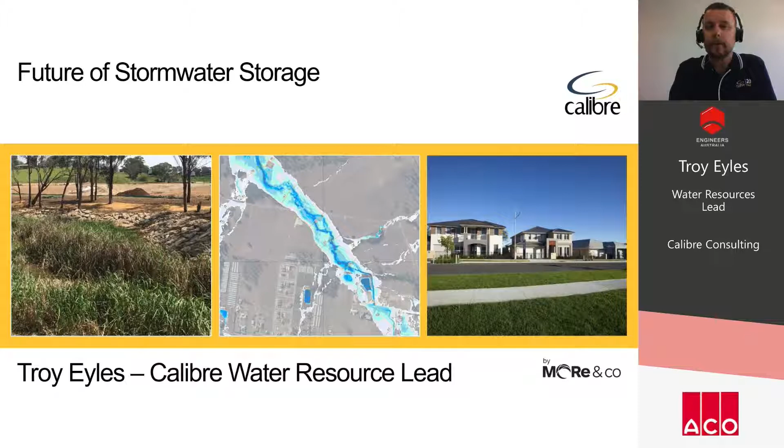So to start with, I'm going to go back to why do we need storage? We start with the fundamentals so we can all be on the same page. I will then quickly move on to the types of storage, the benefits of below ground storage, and some of the considerations when you're selecting the type of storage.

I'm sure we've all seen the water cycle going back to the days at school. And really, nature was really in sync. We'd have rainfall that infiltrated and fed our vegetation, runoff went to our creeks and rivers and entered our surface water, evaporated, and the cycle went. As I said, nature was very in sync.

And then we introduced humans. Probably more realistically, as we started to progress, we started to replace some of the vegetated pervious areas with these concrete jungles of hard surfaces. Suddenly stormwater became problematic, and our solutions traditionally were about getting water away as quickly as possible. So we introduced concrete pipes, concrete channels to really get that flow away. But really all that did is increase some of the volumes, increase some of the flows and velocities, and cause poorer water quality for our receiving waterways.

So while there is a need for concrete pipes and channels, we also had to think outside the box a little bit, be a little bit more creative on how we manage stormwater. And that's when stormwater storage became its own field. There are a number of storage types - we'll be focusing on detention, retention, and infiltration.

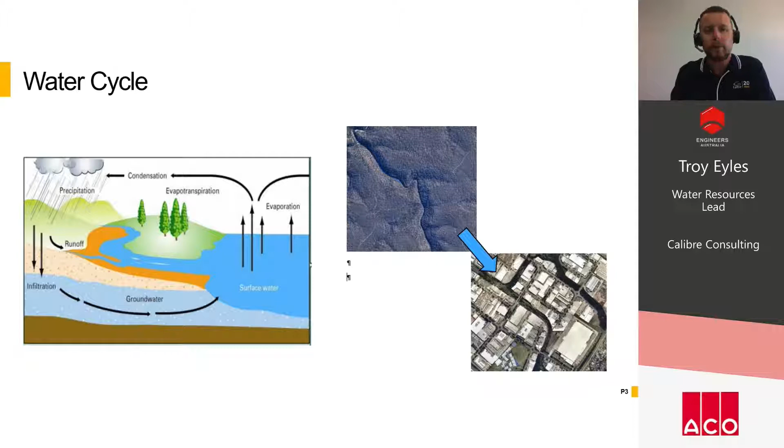Stormwater detention is really an effective means for managing some of the flooding and excess stormwater flows. It really is only a temporary storage of stormwater during the storm event that's then released at a controlled rate.

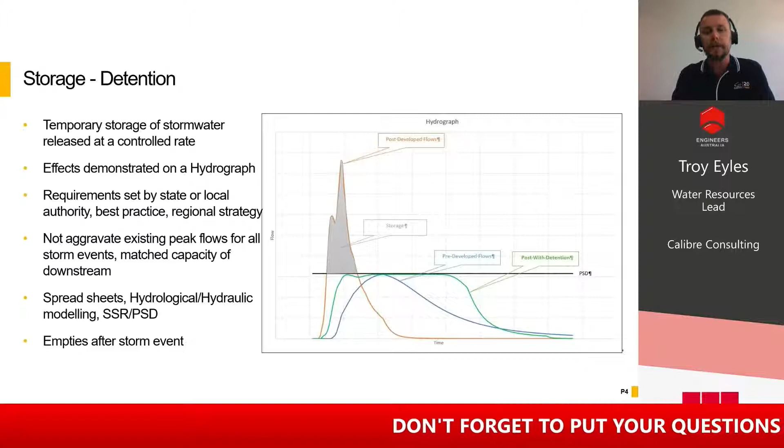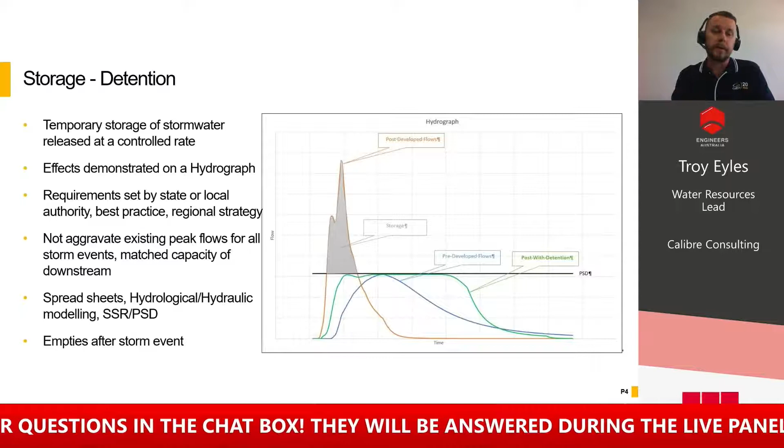We can sort of calculate this on back-of-the-envelope calculations or detailed spreadsheets, but more times than not it's usually hydrological and hydraulic modeling that's used to size this. So that's a matter of representing some of these pre-developed and existing catchments and determining the flow rates for those, then seeing what would happen when we increase these impervious areas. Then we hydraulically model these tanks and outlets, trying to mimic some of those existing peak flow rates and size these detention systems.

Alternatively, some of the local councils may have already done some of the heavy lifting with the modelling, and they'll be able to provide you with a site storage requirement or a PSD, which is the permissible site discharge. That typically will tell you the volumes and flows you're allowed, shown as a per hectare of site area.

It's important to understand that with detention storages, they really need to be free draining. They need to empty as the storm finishes, so they're ready to go again, with that active storage ready before the storm event starts.

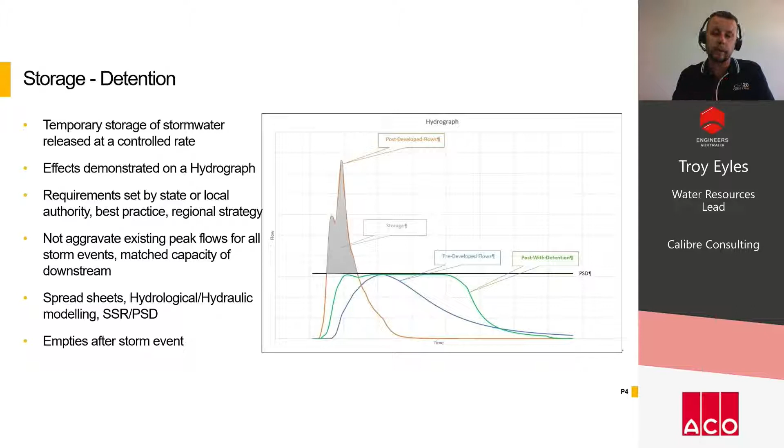An alternative storage is retention. Now, retention doesn't replace detention - it's more part of the overall water cycle management. So that's the holding of stormwater for reuse, to meet some of our reuse demands and also manage some of the volumes.

Once again, the requirements are often set by authorities, which will specify minimum volumes that need to be met, in line with some of the best practices. There could be a regional strategy developed for that catchment that will specify those. But more times than not, it's defined by the water demand.

We can often be quite forgetful in these times of heavy rainfall and flooding, that not long ago a lot of us were under quite tight restrictions. The dam levels were down, we just didn't have the water supply to meet some of our demands. And that's where water retention really comes into its own - it's about understanding those demands and supply and matching that up, and that's probably best done by a water balance.

It can be in spreadsheet form, but also your MUSIC and other modeling programs are best suited. They're about modeling some of those rainfall events and the distribution of those rainfalls, understanding the catchments, and understanding those demands and what reuse and storage is required to meet those demands.

The key to any effective water balance and sizing of a retention system is really understanding the reuse and the uses. A lot of the time we look to harvesting and irrigation as a reuse, and they are an effective reuse, but the catch-22 is when we have the most rainfall, our storages are full, which is when we don't need to use it for irrigation. So it's best practice to have alternative methods which aren't weather dependent to be compatible with the water harvesting style of things.

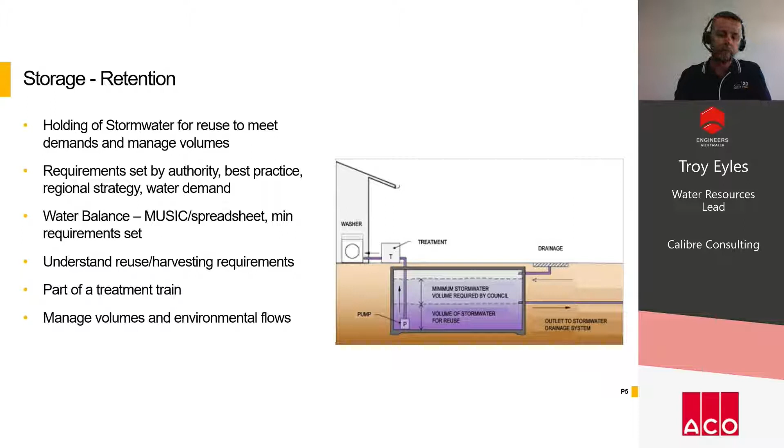The third opportunity for storage is infiltration. It really is an effective way to manage flows, volumes, and also some of the water quality. It's just the storage that holds the water while we promote the infiltration into the soil. It recharges the groundwater, but also starts to try and mimic some of the pervious areas of the natural catchment by introducing the water back into the environment and filtering through that way.

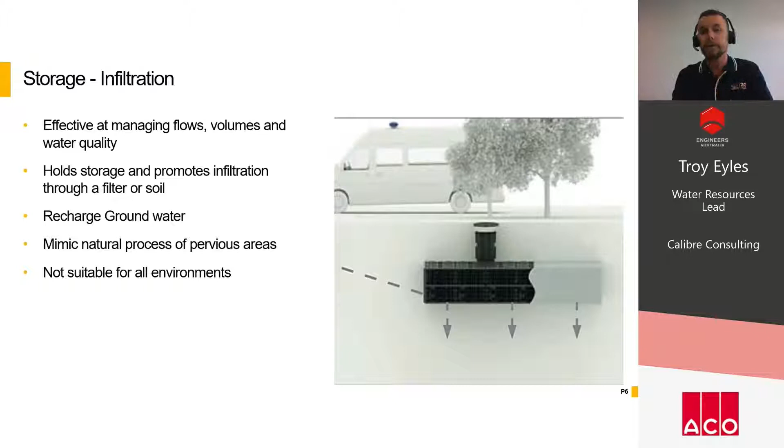It's important to understand that infiltration isn't suitable for all environments. For soil types that have a very low infiltration rate, such as clays, it really doesn't work very effectively - there's no sort of drainage through those soils. Alternatively, with saline or sodic soils, it's really not a great opportunity to promote infiltration. It's better to keep the surface waters and the groundwaters separate in those scenarios.

When we think of a lot of stormwater management, we do envisage these large regional basins at the end of the line. And while they're very much an effective place for regional treatment, it's often hard to find the land areas that aren't heavily constrained that these sort of storages do require.

So the introduction of underground at-source storage really does open a whole lot of new possibilities. It allows us to have multi-uses for the stormwater management. They can be within the building surface footprint itself. They can be in the basements. They could be underneath an open space area. It also doesn't have to be all below and all above.

So there can be a combination of the two. You can have your nuisance, regular storm events being contained within an underground storage that then can just overflow into a multi-use above-ground area for the more rare and high storm events.

Overall, our below-ground treatment can form part of this overall treatment train. It can be combined with some underground pre-treatment or alternative methods and form part of that treatment train to achieve some of the water quality targets.

The other advantage to below ground, they're a very known area. The square sides and equivalent volumes can be calculated quite easily with no changing parts. There's no degradation of batters. There's no vegetation which could sort of absorb some of this active storage area. So they're very known, sufficient, no-changing solution.

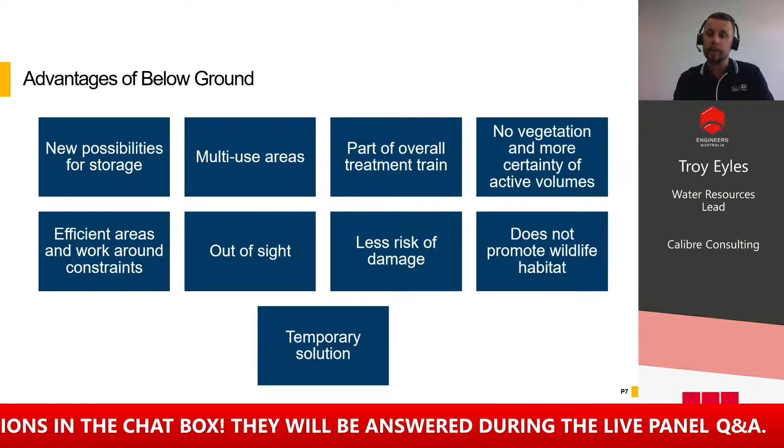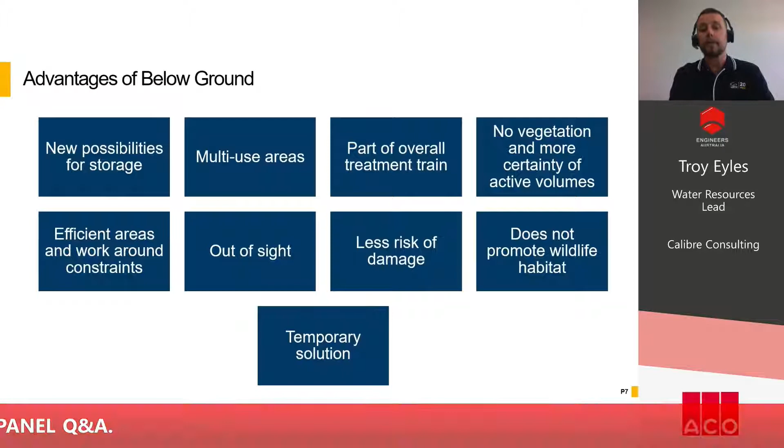With stormwater management, we often do look to try and mimic some of the natural environments, but these can create habitats for wildlife. In some areas that isn't quite ideal - in a lot of cases that might introduce pests. You'll often hear about bin chicken habitats forming in a lot of these stormwater management systems. You might have heavy foot traffic where you don't want to promote dangerous or potentially venomous animals to be within the region. Also, if you're working around an airport or a flight path, you may have regulations not to promote bird life because of the fear of interaction with planes. So there are solutions in putting these storages underground, to just avoid the need for wildlife habitat.

And lastly, with these regional basins, they are quite timely, and often the development is ahead of them, so there's the need to provide temporary solutions. The underground storage means that we can progress with the development while not having to wait, and also achieve the water quality targets in a temporary nature.

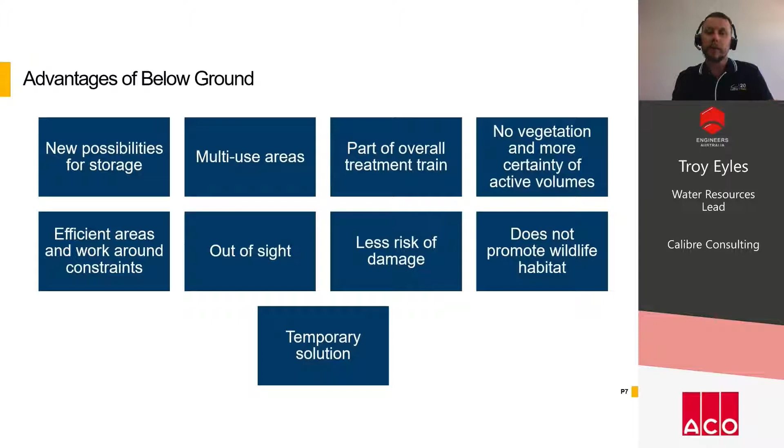There are a lot of considerations when it comes to designing and picking what sort of storage to go with, and it starts well before the design. You're going to start to think about some of these levels, specifically with the detention basins. They really need to be free draining, so these outlets, although underground, need to eventually see daylight or connect to a system.

We need to really think of the hydraulic constraints. Is there backwater that could be affecting the performance of these issues, and design around those? And while we talk about potentially having underground storage combined with basements or under building footprints, we really need to consider design for failure, so having these emergency overflows in the event that the outlet gets blocked or the system fails. We can't have damage to buildings or potentially risk of life, so we need to incorporate those well early in the design.

We also need to consider what is above or surrounding. What's the soil mechanics? What's the groundwater like? What sort of structures are above? And that really leads into the design of the structure itself, when you consider the materials, not just in terms of strengths, but in terms of the environment. Are they environmentally friendly? Does this material suit this environment? And then move on to consider whether there's some precast or modular opportunities that we can use.

The multi-use is really the advantage in the underground systems. It's how can we combine these detention, retention, and water quality structures in the one unit, and potentially what other uses can we have? So really maximizing our area.

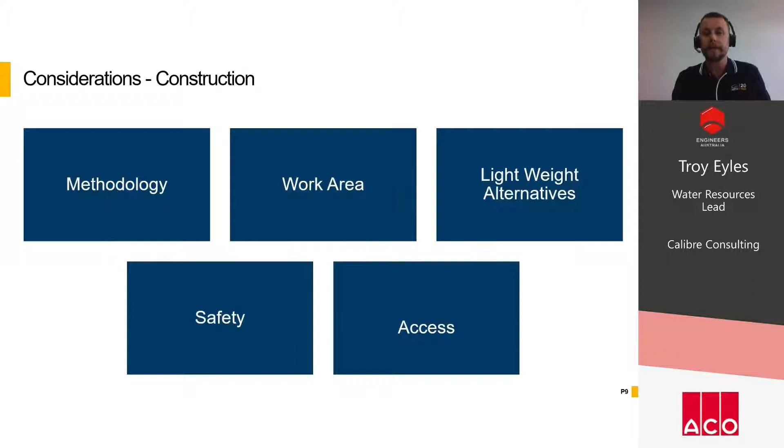In the design, we also need to consider construction early on. We need to understand the methodology and how we can work around that. What area do they have to work with, and how can we make it easier for the ultimate construction? Are there lightweight alternatives which can really limit the sort of machinery required and make it a lot safer for those workers? And consider access to this site. A lot of these sites are very constrained, and understand how we can design to make this easier to access and construct.

And then ultimately, we need to start to really think about the operational phase and start to consider what will be the lifespan of this design when we're selecting a unit. And then consider, when is this storage going to be online? A lot of the construction processes, and specifically the construction sediment, can often be detrimental to a lot of these stormwater systems. So think hard and fast on when this unit will be online and what sort of measures we can use to protect the unit during the construction all the way through to its operation.

And that leads us on to maintenance. You really want to minimize the need for maintenance, and that might require some pre-treatment of gross pollutants and coarse sediments prior to the unit. But ultimately, it's not avoidable. You really need to design for access, but think about how we can minimize the need to access into the unit. What machinery is required, and how can they get in there, early on into the design?

And ultimately, safety. We think from the construction perspective, but ultimately end user. How can we avoid people having to enter this and avoid public access? How can we think about potentially the inlets and outlets and how public safety could be affected by that?

And finally, consideration is more heavily on the certification. We think about how this is going to operate and how this has been constructed, and how ultimately someone has to put their name to it. So you really need to be confident with both the operation and construction of these units. A lot of the precast and available products online have had rigorous testing, so by all means, critique that and use it to your advantage to understand the units that we're going to be putting in.

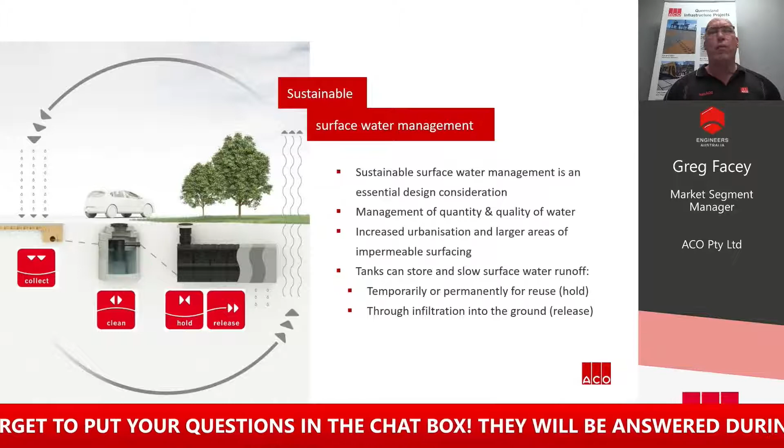Underground tanks are used in a lot of projects as councils legislate to protect their downstream waterways and infrastructure. Managing both the quantity and the quality of water being discharged off a site is only going to grow in importance, particularly as our cities urbanise and rainfall events intensify as the climate changes. These days, large areas of the built environment are covered by impermeable surfaces, which increases the risk of flooding. Tank solutions are a conventional way to store and slow down surface water runoff to pre-development rates, as well as replenish the groundwater at a more natural rate.

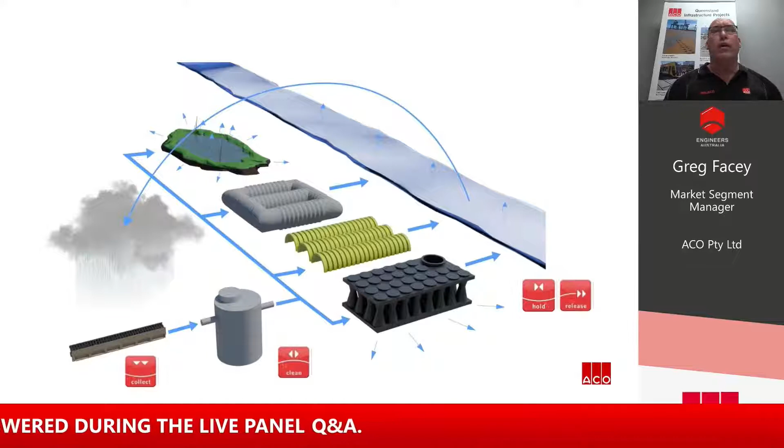These are the system elements that are designed to work with the natural water cycle. On a slab or a pavement, drains are typically positioned to intercept or collect stormwater runoff, which is then treated or cleaned to prevent clogging or contamination downstream. As you can see on the image, there are a number of tank solutions available to engineers and urban designers, both natural and engineered structures.

Some of the engineered tank solutions include cast in place, precast concrete tanks, arches, and plastic structures. But today we'll focus on just plastic stormwater tanks, which can be easily integrated in a stormwater management plan for the infiltration, retention, or detention of the surface water runoff.

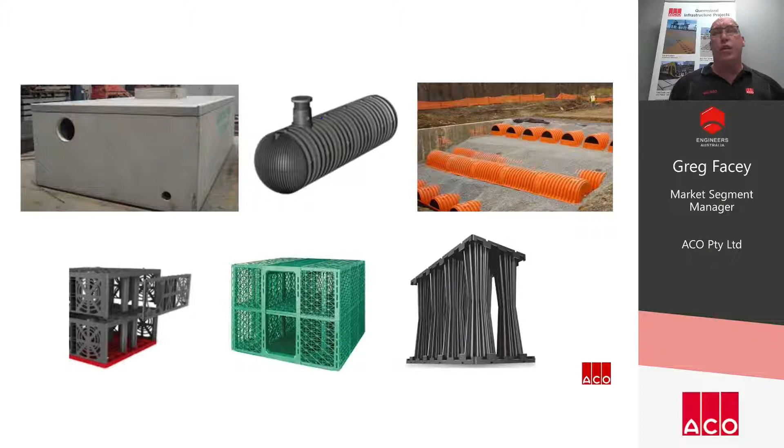Detention systems, also known as attenuation systems, are designed to spread the peak flow of a storm event. It does this by holding and releasing stormwater slowly, controlling the runoff to reduce the risk of flooding downstream from a development. A retention system collects and stores water permanently for reuse, for example to water landscaped areas. Infiltration systems, or soak wells, are used a lot in sandy areas to temporarily store the water to allow it to naturally seep back into the ground to replenish the dropping water table.

To illustrate this, retention and infiltration are two common adaptations of these tanks to make the best use of captured stormwater. Retention, so it can be used for irrigation or reuse purposes, and infiltration, where the soil can naturally free the water from its impurities. In both cases, the water is used at or close to the source of collection without it flowing through any downstream infrastructure or receiving waterways.

But if discharging into downstream infrastructure is the objective, then as I explained before, detention gives designers the greatest control over the quantity of water entering it. In simple terms, it's an easy calculation.

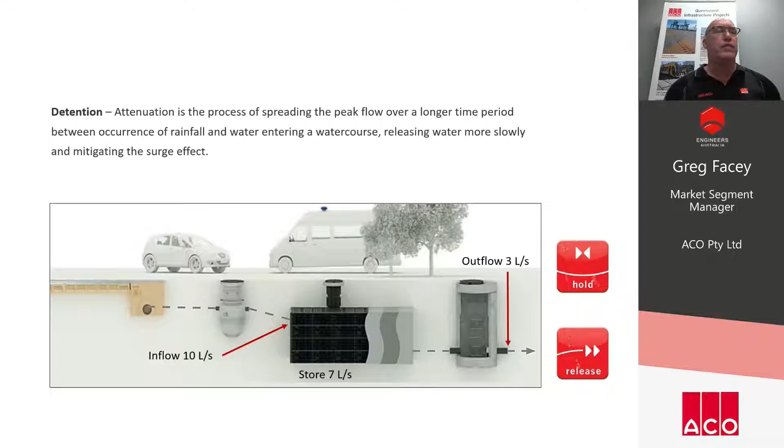Before I go on, I want to make a special mention of two types of hydraulic control structures. First are stormwater treatment devices, located upstream of the tank, with their performance individually assessed and governed by the EPA and local DA requirements. Depending on the project requirements, there are many types, from gross pollutant or silt traps, stormwater filters, to even light oil separators where hydrocarbons exist.

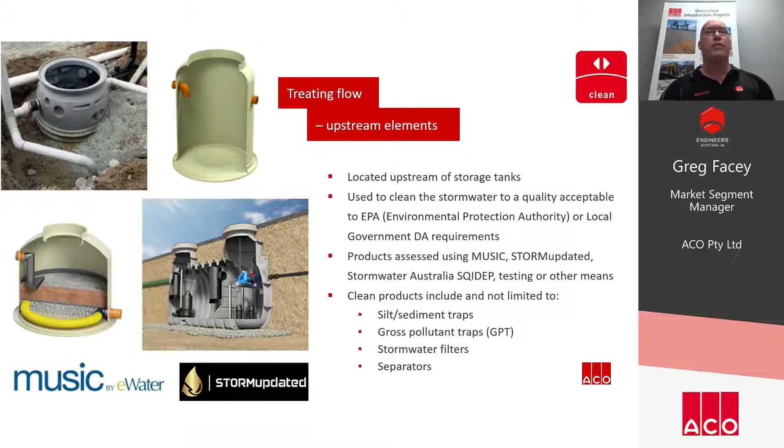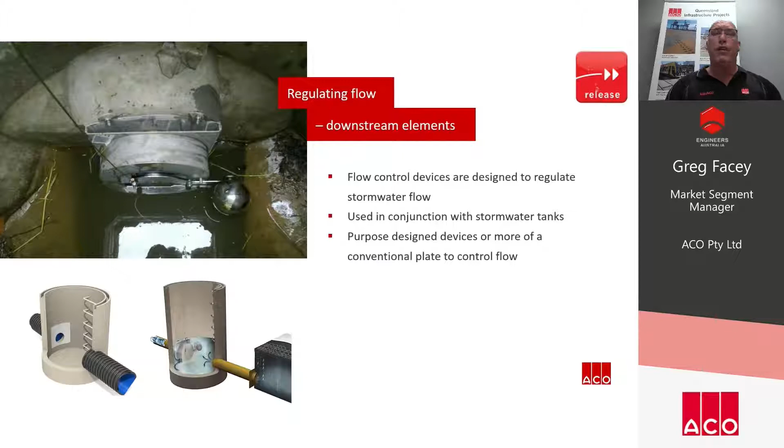The other type of hydraulic structure are flow control devices, which, as the name suggests, control the release of water at prescribed rates downstream of the tank. These are typically installed in chambers with either purpose-designed mechanisms or just a conventional orifice plate. Now, both of these hydraulic control structures are not the topic of today's presentation, but I wanted to at least mention them as they are essential elements that affect the quality and the quantity of the water being discharged off the site.

Now, I want to go back to this slide to give an overview of the storage options available. So from the top, we've got a detention basin, and you often see these in low to medium density areas. They tend to take up space that could otherwise be used for urban or commercial development.

Next are concrete tanks. They are normally expensive to construct and transport just by the nature of the weight and the size. Next along are plastic arch systems, which require a decent amount of space. And finally, plastic tanks. Within this large category is a huge range of options, with not all being equal though.

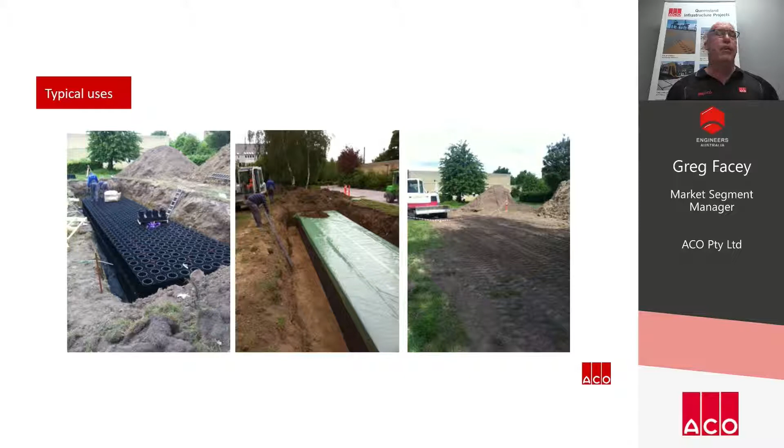So today, I'm going to focus on plastic tanks that can be assembled into producing underground cells for water storage. These can be adapted in a softscape where infiltration can be achieved. And here you can see them being assembled, wrapped, and then backfilled.

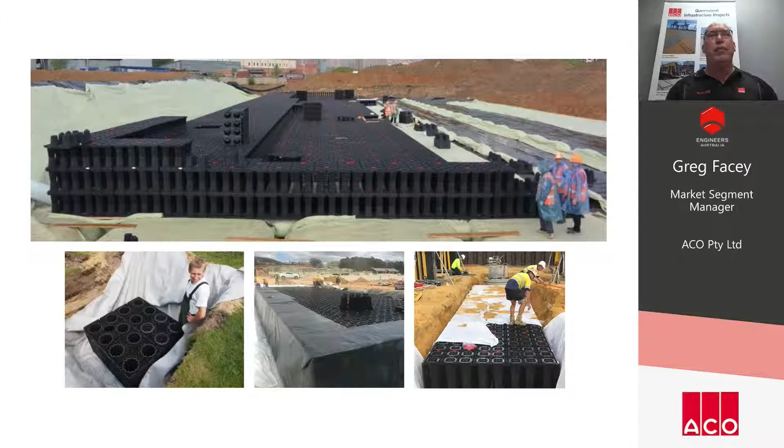But they can also be installed under slabs in commercial and industrial applications where the space is at a premium. In fact, geocellular tanks are installed in lots of projects, from car parks, driveways, in landscaped areas to commercial buildings, industrial areas, airports, and military bases.

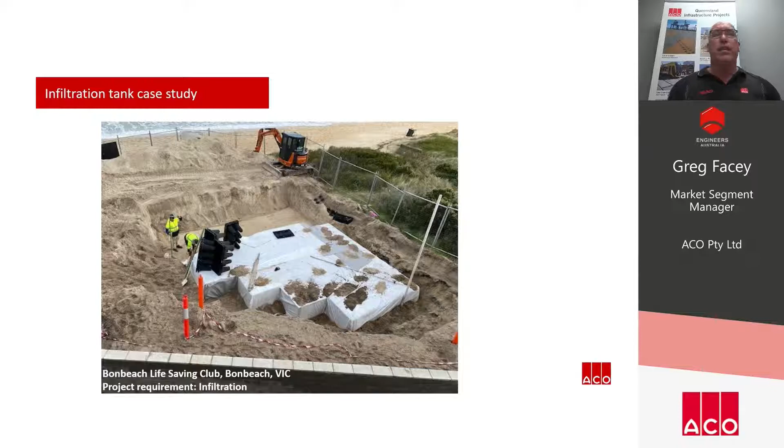So in a recent installation, here is an example of a tank being used for infiltration for a surf lifesaving club. Stormwater capture from the club's roof and its infiltration into nearby vegetation was part of the sustainability design brief. With limited space to work with, designers needed to maximise the storage capacity of an infiltration tank while fitting it into a very restricted space. An easy to maintain full bay sedimentation trap was also required.

Unlike concrete tanks, plastic tanks are quite versatile. They can be cut and joined, and the structure can be readily used for infiltration. Good designs have high void ratio and can connect to large inlets and outlets that can be easily inspected. Good designs are also load rated to hold their strength over time.

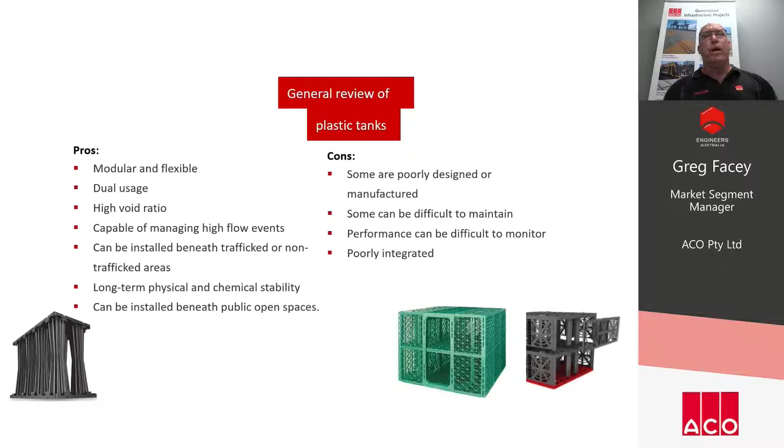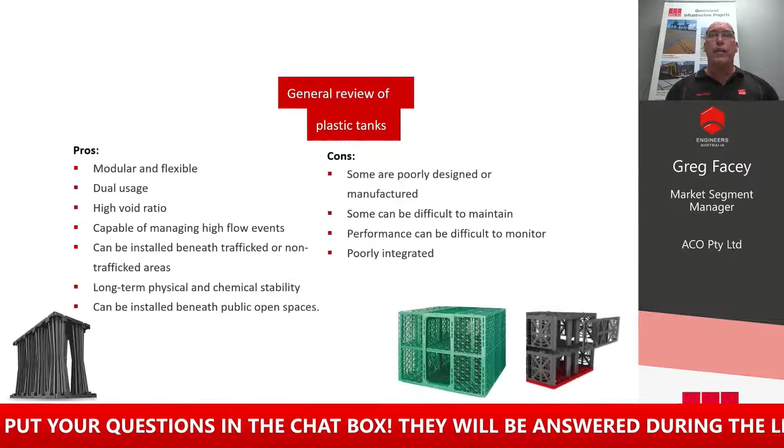But there are plastic tanks that are poorly designed, poorly manufactured, and difficult to access, monitor, and maintain. Unfortunately, these give all plastic tanks a bad name. And finally, the engineer has a responsibility too here. Despite the design or the maker of the tank, products always run the risk of being poorly integrated in a stormwater management plan.

So when specifying plastic tanks, there are a number of things to consider. Councils, through their development control plan, will enforce compliance to regulation. They will specify the methods an engineer needs to use to ensure the property meets the stormwater management plan. And this takes into account the volume of water the property needs to manage from the landscaped or the hard stand or the roofed areas.

But not only does a certifying engineer need to integrate the tanks properly, but as all key stormwater products, the structures themselves need to meet minimum strength, durability, and quality requirements.

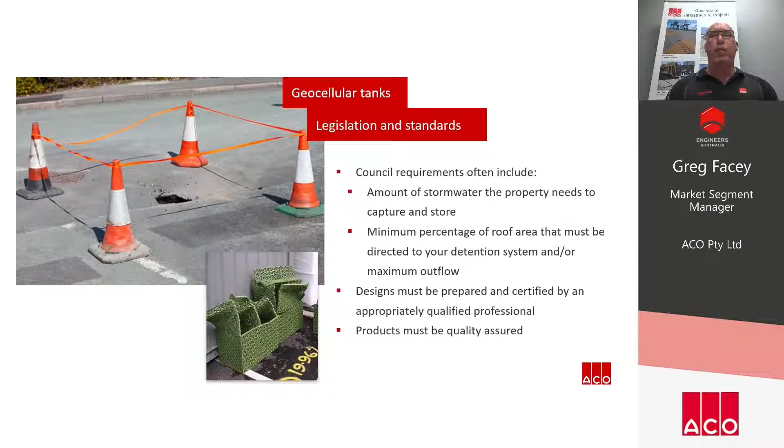But in Australia, there's no standards that actually govern plastic tank systems. And the problem with that is that some manufacturers make claims about strength and design life that really just aren't substantiated. However, there is a UK standard called CIRIA, which is specifically written around geocellular tanks. It gives guidance on testing, structural design, construction, and installation. This is really the gold standard to benchmark performance, as such, manufacturers should qualify their products to this standard to ensure that failures don't occur and the design life is maintained. So we encourage you to expect compliance to this standard when dealing with a manufacturer.

A structural design should consider the load-bearing capacity of a tank. So the stronger the tank, the shallower it can be buried, resulting in reduced construction costs. But what determines the depth of cover required are things like the soil type, tank design capacities, the groundwater level, pavement thickness, and the design loads.

CIRIA identifies these as the main factors that are overlooked that contribute to failures. And manufacturers must be able to come clean with their strength data and prove it with independent testing. So to address all this, CIRIA have detailed all the requirements for laboratory strength testing.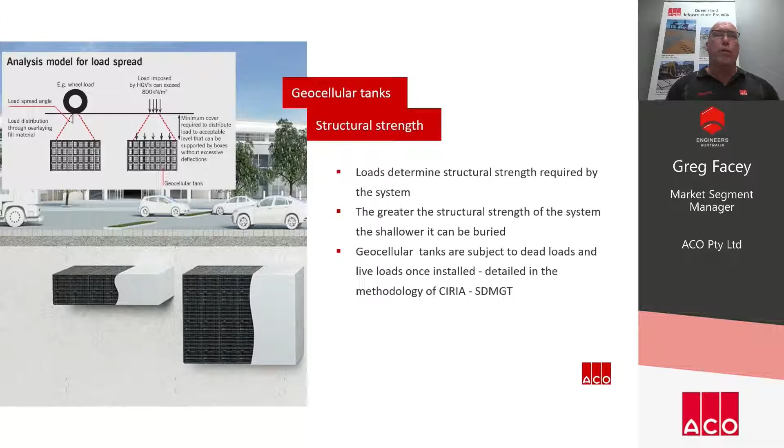When considering loads, both short-term and long-term loads must be addressed. Dead loads include the mass of soil surrounding the structure, plus the weight of any slabs or anything else permanent that a tank may be subject to. Live loads are temporary loads, things like vehicles, which also need to be considered.

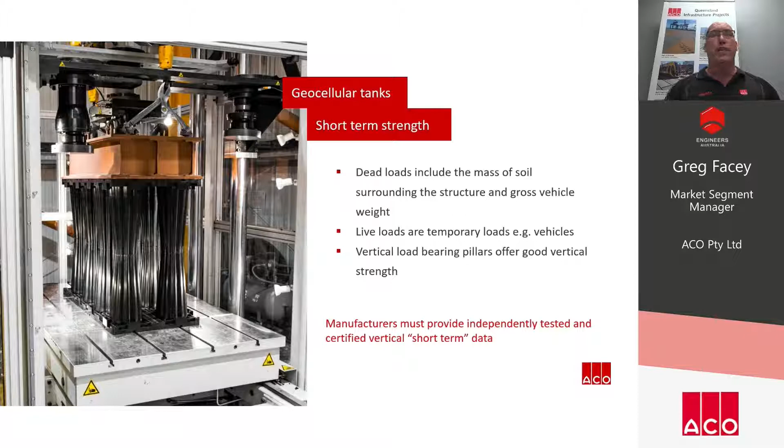Tanks that have vertically aligned load-bearing pillars will offer good vertical strength and stability, and manufacturers should be able to provide you with independently tested vertical load results.

However, lateral loading is just as important as vertical loading, as it takes into consideration the soil mechanics, and this is a key driver on how deep a tank can be installed. Be aware that specifically in high water table applications, tanks can be pushed out of the ground. So in these instances, either locate the tank close to the surface to avoid the water table, or beneath a heavy pavement to help anchor it down.

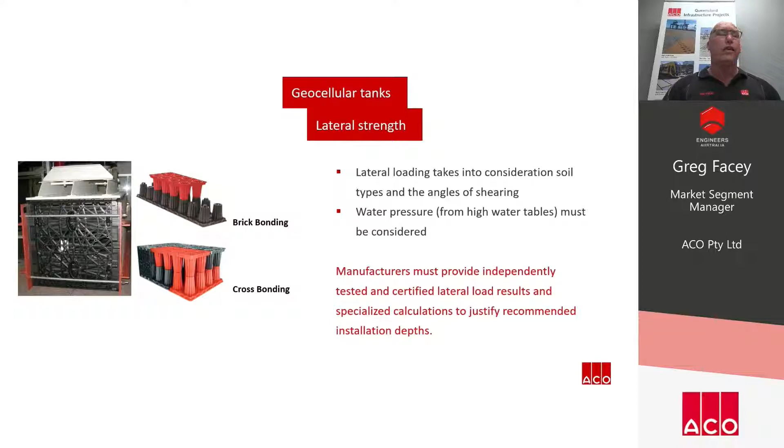Great emphasis should be placed on jointing methods, and systems that use a combination of cross bonding and brick bonding allow for a more rigid tank construction. Again, manufacturers should provide independently tested and certified lateral load data, and this is to justify the installation depths that they recommend for your project.

However, some manufacturers have a tendency to only disclose short-term and not long-term test results for their tanks. Products need to be able to sustainably support loads over the design life of the project, and this is crucial for a durable installation. Tank materials are liable to creep, meaning they deform over time, and products must be strong enough to withstand this.

Long-term strength test data allows manufacturers to determine the design life of their tanks. Not appreciating long-term strength can have extreme consequences.

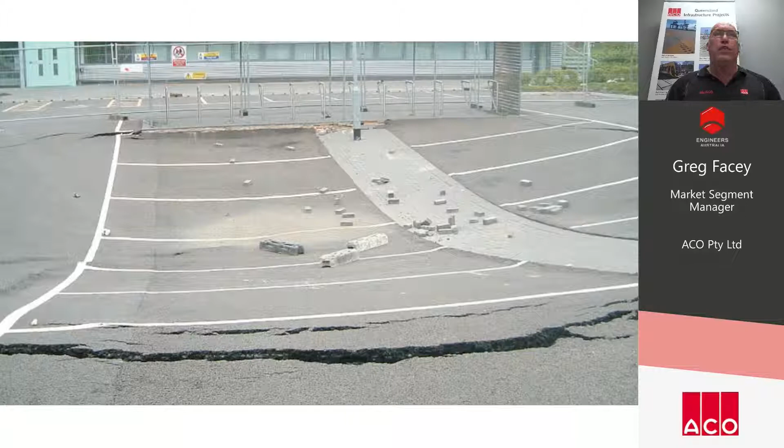Look, this is an example of an installation where the tank has failed because of creep. It's everyone's nightmare, and it just highlights the importance of long-term strength. Here's another one, not a sinkhole, but an actual tank failure in Pittsburgh, Pennsylvania.

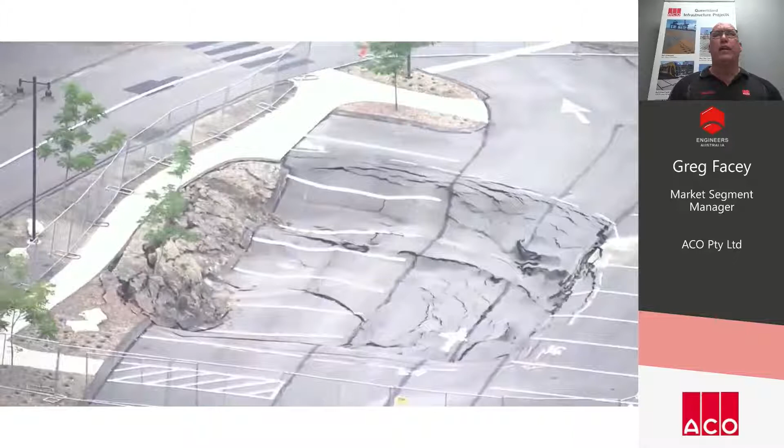Taking a tank out of a controlled environment like a laboratory and measuring behaviour in a typical environment gives all stakeholders a better indication of performance. While CIRIA provides a methodology behind laboratory static tests, ACO conducted a full-scale live load test on one of our buried tanks to an American standard. This was documented by Ohio University. Equipped with sensors to measure vertical deflection and lateral movement, the tank was installed as it would be in practice.

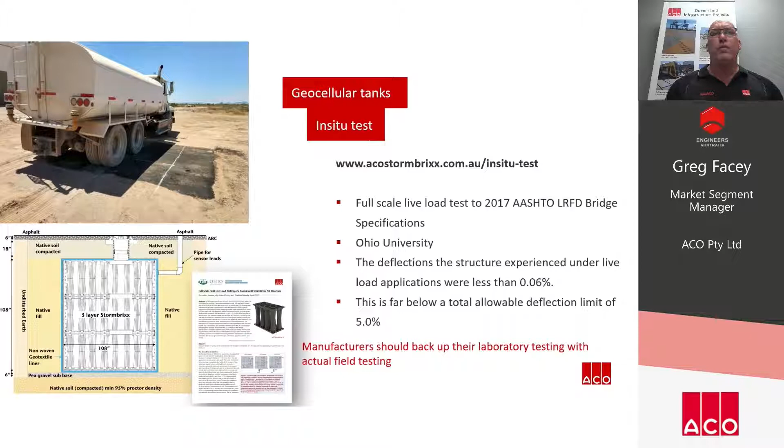Here's a short video of the test.

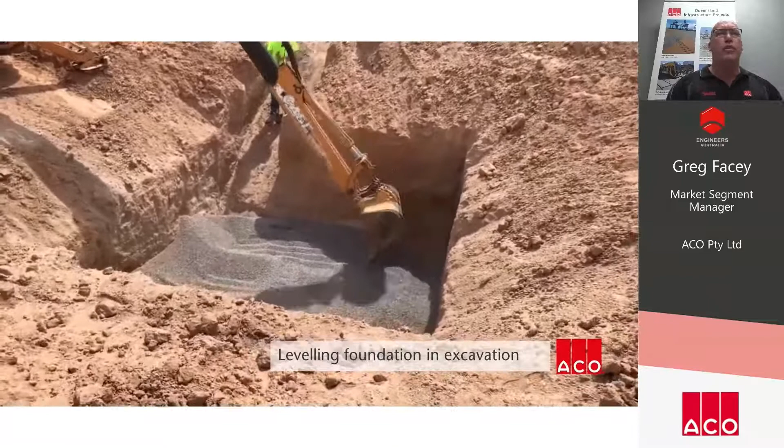It was a 15 cubic metre, 3-layer tank, which was backfilled with soil and finished with a layer of asphalt. The objective was to measure the structural responses under static and dynamic live loads, and a 27-tonne truck was used for the test. The first step was to excavate and level the foundation.

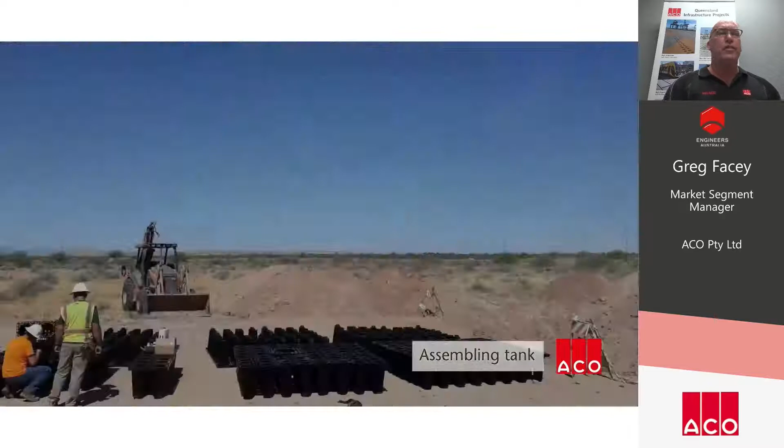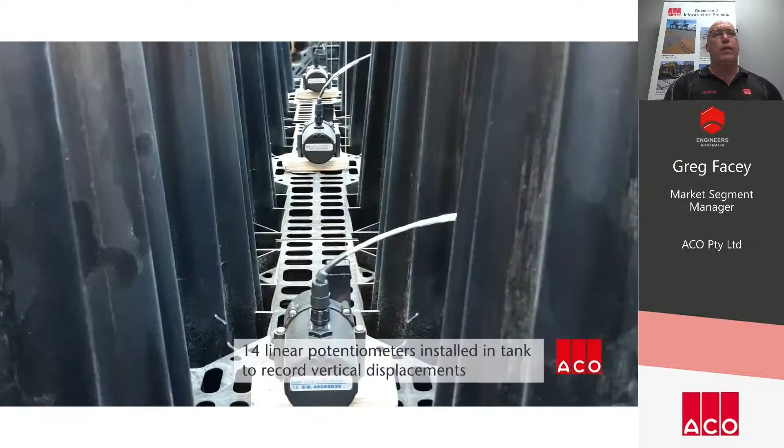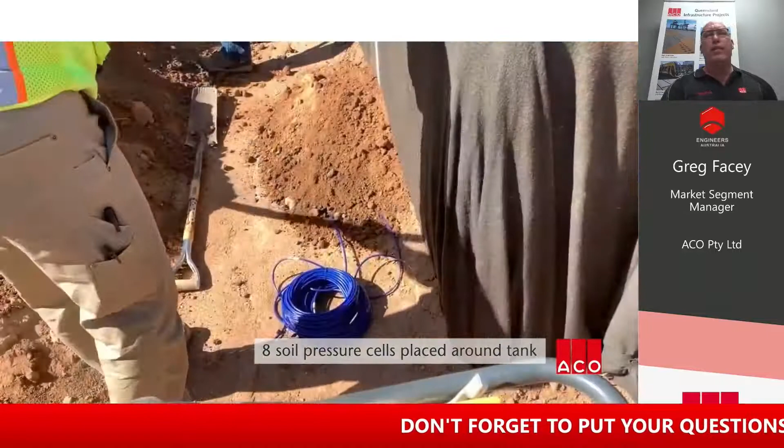Tanks were then assembled adjacent to the excavation. A total of 14 potentiometers were installed inside the assembled structure to record the vertical displacements or compression. Then, as would be the case with a typical OSD tank, the structure was wrapped with a geomembrane. A total of 8 vibrating wire soil pressure cells were placed beneath, around and on top of the buried structure to record pressures that develop in soils adjacent to the structure.

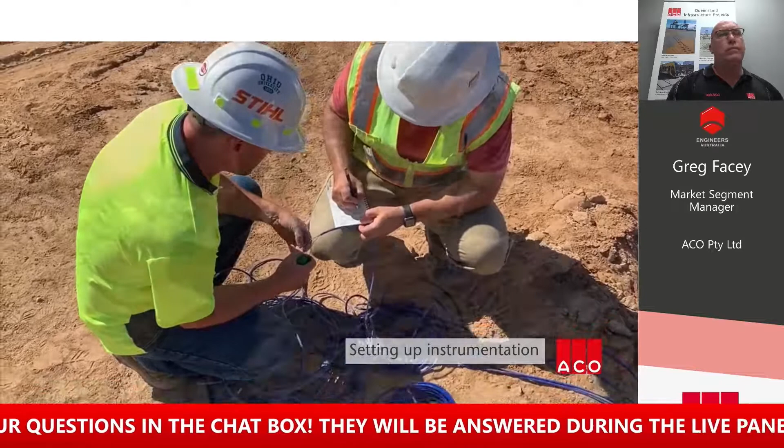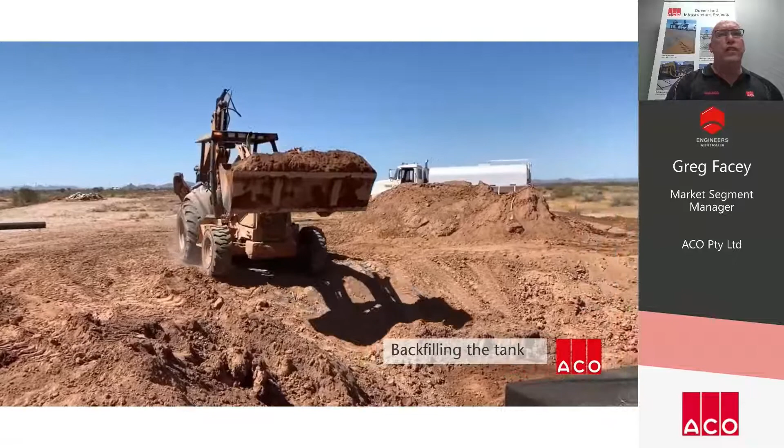To finish off, the tanks were then backfilled, then also compacted, and then asphalt rolled on top of the tank system.

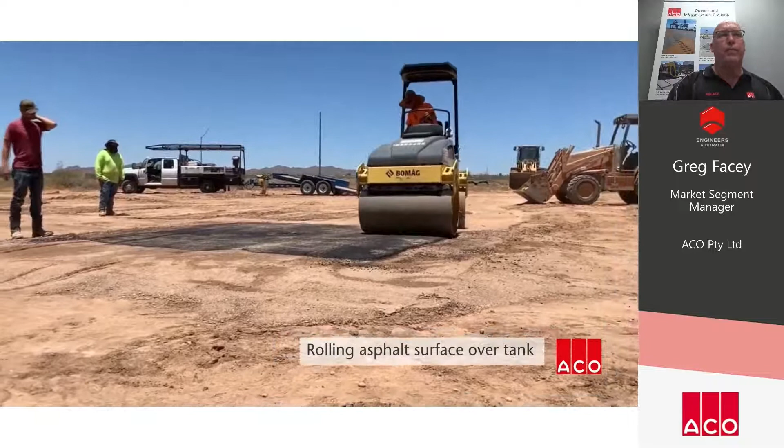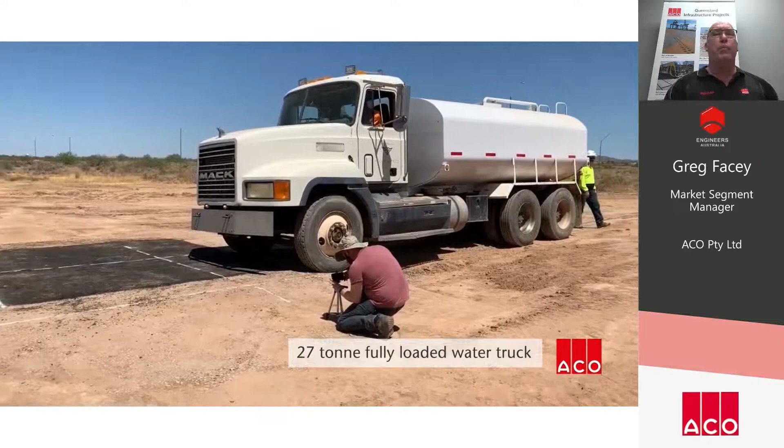During the test, a truck was driven numerous times to simulate the dynamic loads that would be experienced in practice. A total of 23 load tests were conducted, and the truck was also parked for a period of time above it to ensure the static load requirement was met. The results were all collated and the university compiled a report.

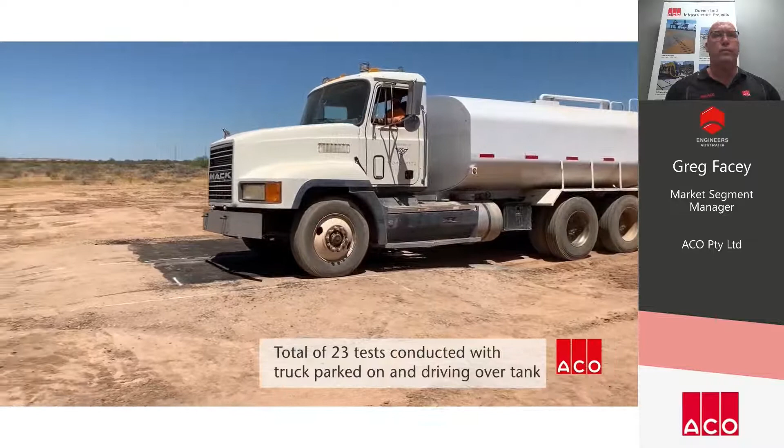The deflections the structure experienced under live load applications were less than 0.06, far below the allowable deflection limit of 5% set for buried polypropylene drainage structures in the AASHTO bridge specifications. During the repeated heavy static load applications, the structure recovered most of the load-induced deformations through elastic rebound upon unloading. Overall, the StormBrixx SD structure proved to be rigid with elastic properties, stable and strong.

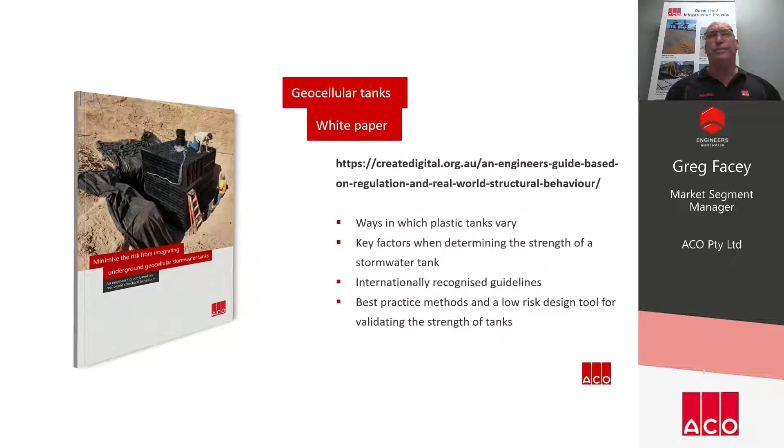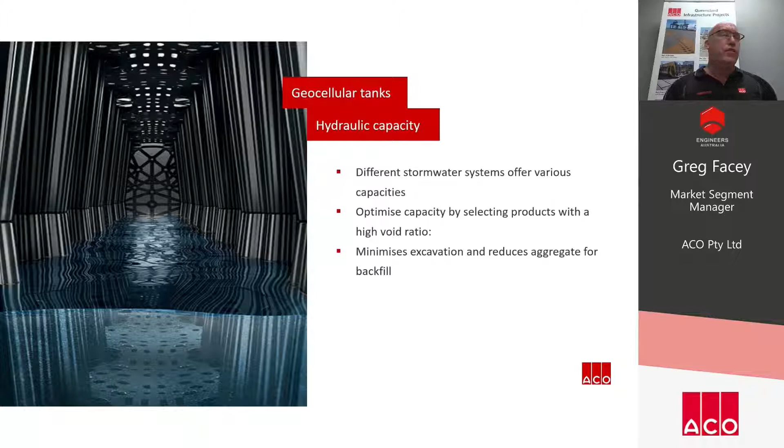For tanks, the hydraulic capacity refers directly to the volume of water that a structure can store, and different tanks in the industry will of course offer different capacities. You can optimize the capacity of the tank by selecting products with high void ratios, which is over 90% for geocellular systems. Having such a high void ratio reduces excavation and obviously the construction costs because of that.

Now, arch systems, just for a quick comparison with geocellular systems, have a void ratio of around 50%, which essentially means the excavation needs to be almost twice the size. Arches hold water in the open space beneath them, as well as in the voids above them between the stones. And this isn't an efficient way to hold water, not to mention the additional costs of the stone fill.

So on the screen, you'll see an example of two tank systems side by side offering the same amount of storage. And as you can see, the installation volume of the geocellular tank is considerably smaller.

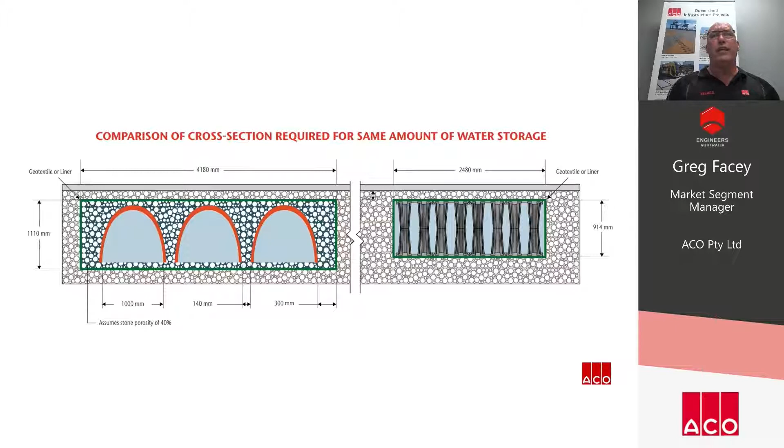As another comparison, let's look at concrete structures. Although concrete tanks provide 100% water storage inside the tank, they do have thick walls, which reduces the void ratio to around 80%, and they are expensive to build and also to install. In comparison, geocellular tanks are more economical while still providing high amount of storage.

For concrete pipes, they're obviously round, but they need a square trench, and each pipe needs about 250 mil approximately of sand or stone bedding in and around the excavation required. Means more fill material, making the installation bigger and more expensive. But a good manufacturer should be able to help you to optimize the space while helping you meet the storage volume requirements of the project.

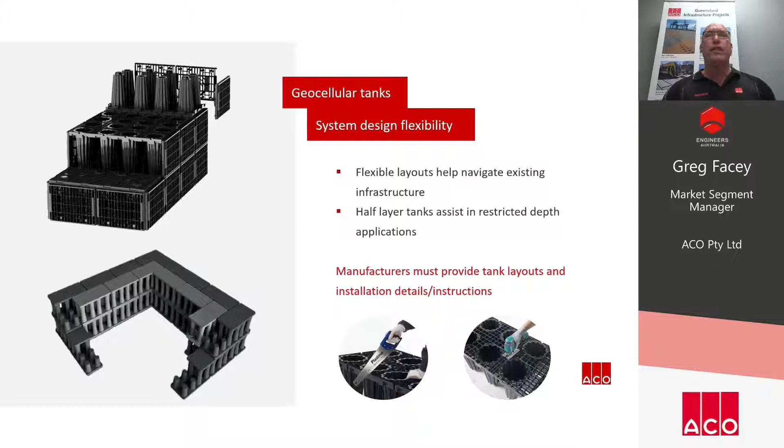A tank that's versatile enough to shape itself in and around your project will give you more options to meet the site's storage requirements. Modular tanks offer the ability to adapt themselves to the underground space with some level of flexibility. This is particularly useful when avoiding things like existing services, buildings and structures or footings. And manufacturers should give you tank layouts which help you navigate the physical constraints of your project, as well as clear installation instructions.

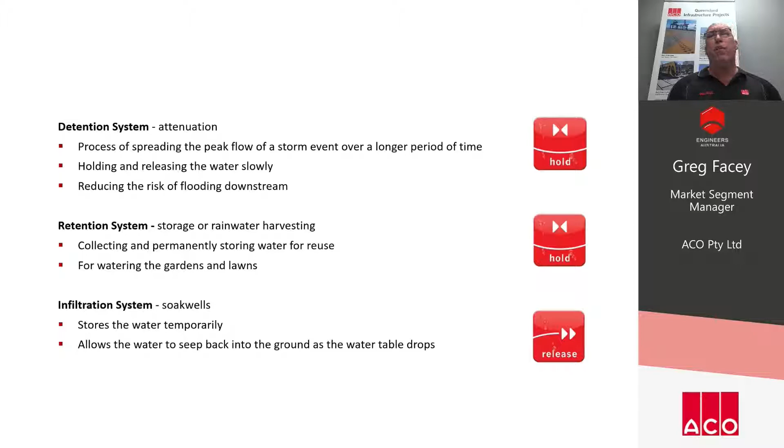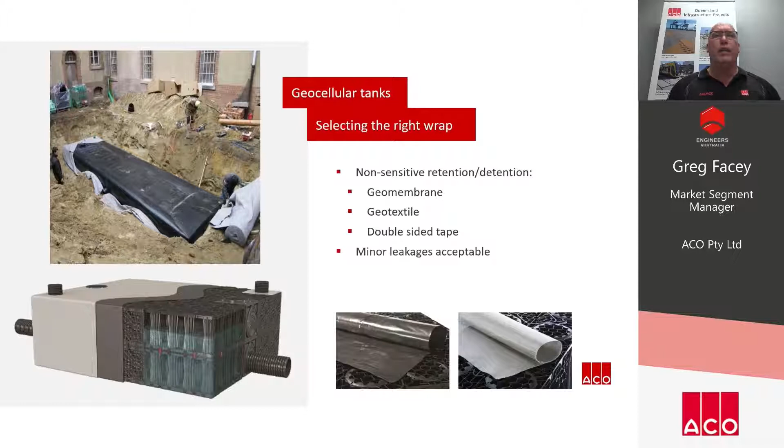As I mentioned earlier, tanks can perform any or a combination of these roles, and depending on how a tank is used, it requires a different type of wrapping. In non-sensitive retention or detention applications, geomembranes are used as a bladder for storing water along with the geotextile on the outside to protect it. As long as minor leakage from the tank can be tolerated, the membrane is normally just taped together, and this is used on the vast majority of applications.

But for sensitive applications, like a tank positioned close to a building or simply to contain contaminated runoff, we would recommend using a welded geomembrane installed by an accredited contractor. This ensures the water tightness, but as before, the geotextile wrapping on the outside needs only tape to secure it, with the focus on the integrity of the membrane. And for infiltration systems, there's no membrane used, just a geotextile which acts to minimize the sediment buildup within the tank while allowing the water to percolate.

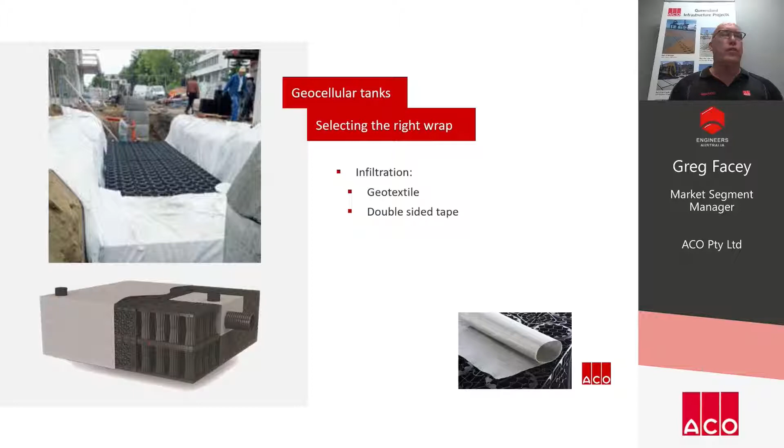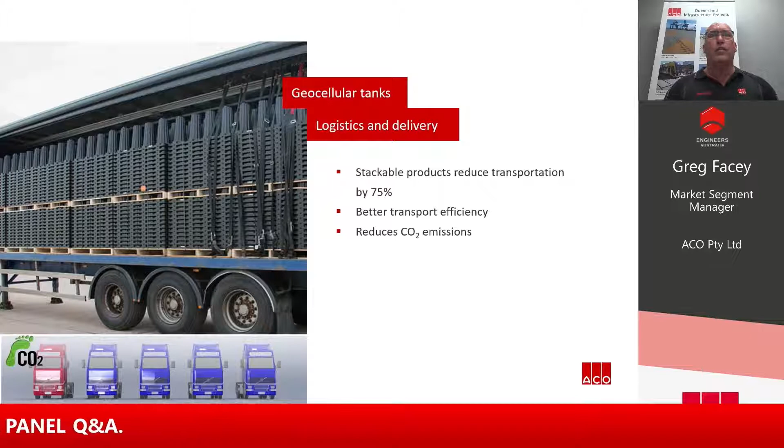Now, stormwater tanks can be very large, and moving them to site and then into the excavation can be costly. So geocellular plastic tanks are lightweight to transport. The modules are designed to stack inside one another, which means that they take up significantly less space than other products. And this leads to fewer trucks on site and fewer trips to the excavation area. Not only is this more cost effective, but better for the environment.

And the site itself should be considered when selecting a product. The time it takes to store and assemble these tanks can significantly affect construction costs. Some tanks need storage, and worse still, some tanks simply don't stack.

Some plastic crate systems are generally assembled away from the excavation area and then lowered in, and there are additional rent and labour costs associated with building and storing the tanks before installation. Geocellular stackable tanks, however, are really beneficial for sites, particularly with restricted space or labour, in that they can be built inside the excavation area and quickly.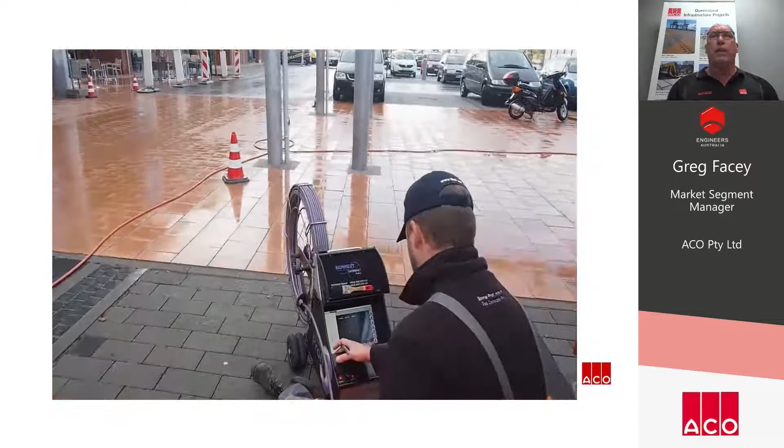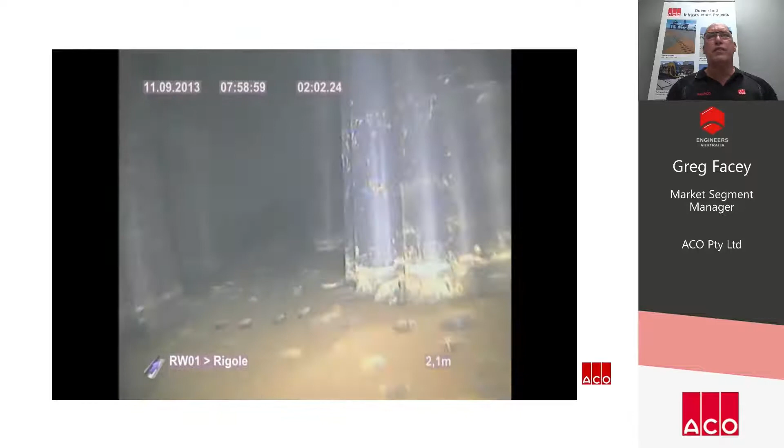Here's a short video showing how a camera was used to inspect a geocellular tank under a pedestrian precinct. You can see the camera move through the system easily without being restricted by any physical barriers in the tank. At the bottom right, you'll notice a chainage counter showing the distance travelled by the camera from the manhole.

So we've come to the end of our presentation, but to summarise, these are key things to consider when specifying tanks: compliance to legislation, the tank's design and strength, void ratios, and how easy it is to transport, plus ease of access, inspection and maintenance.

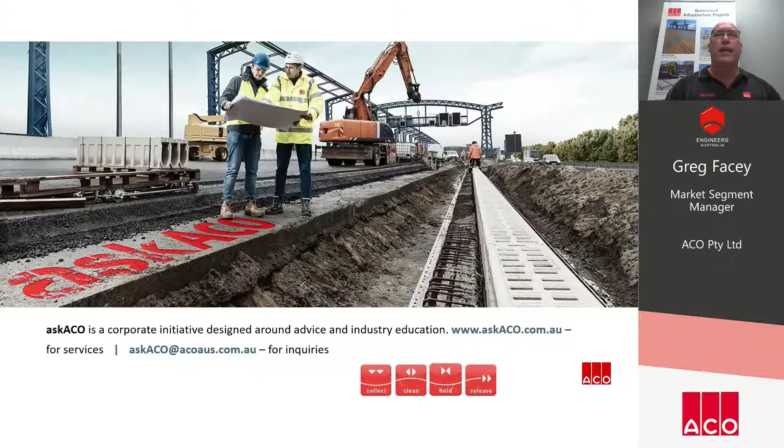As part of our suite of services, we can help you with storage above or below ground. Where the consequences of ponding of water on the surface are low, we can provide ponding analysis when temporary ponding can be tolerated, by deliberately undersizing trench drains to restrict the flow. Alternatively, we can help you remove the water entirely off the surface with adequately sized surface and subsurface drains.

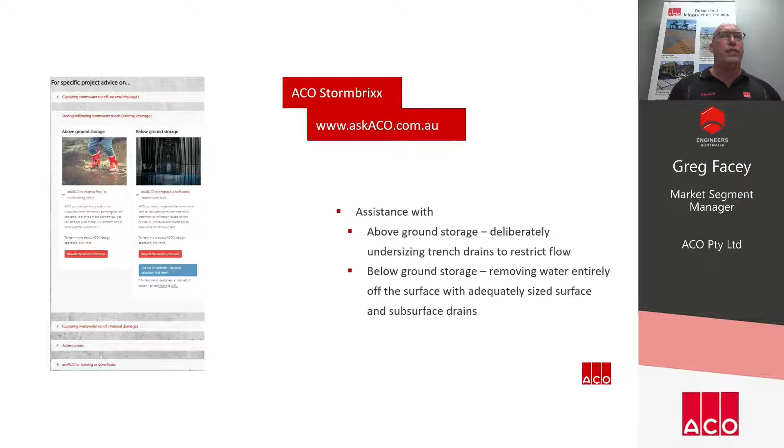For your specific projects, this involves configuring both trench drains and tanks and providing you with a parts schedule for that configuration. We can also provide CIRIA-based structural tank calculations. To make the structural validation process easier, we've designed a simple online calculator built around CIRIA.

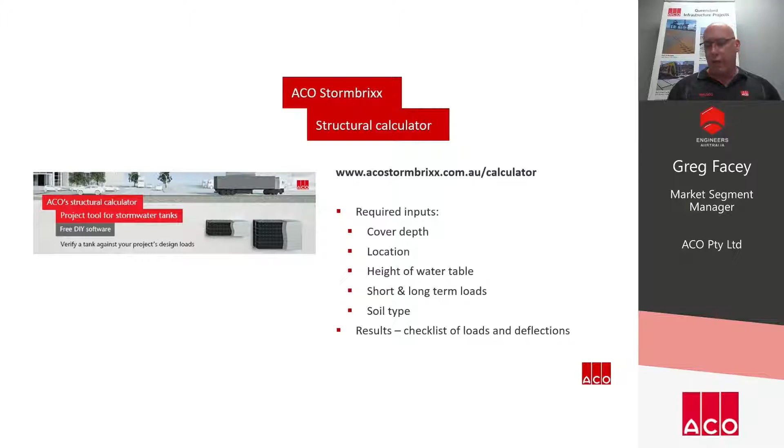All you need to do is provide some basic information relating to your project, then you'll receive validation on whether the tank is strong enough. If the results show the tank is overloaded, the parameter requiring change will be highlighted - for instance, you may need to bury the tank a little deeper. Here's a short video of the software.

After you have registered or logged into the program, click on Start a New Project at the top of the screen. Fill out the project details. This project will be saved under your login name and can be viewed or revised at a later date if required.

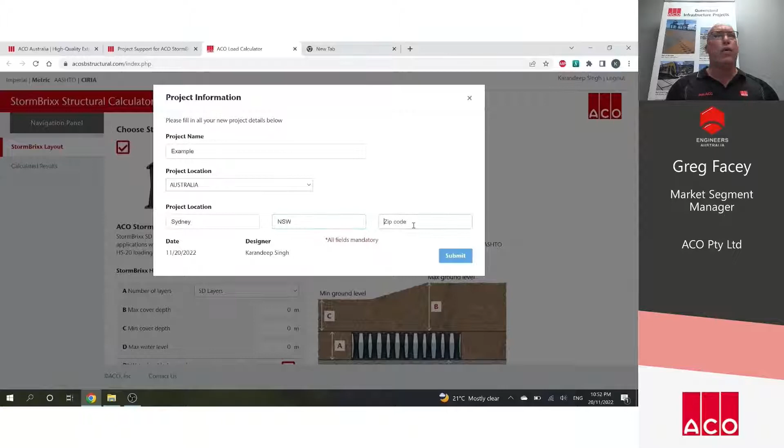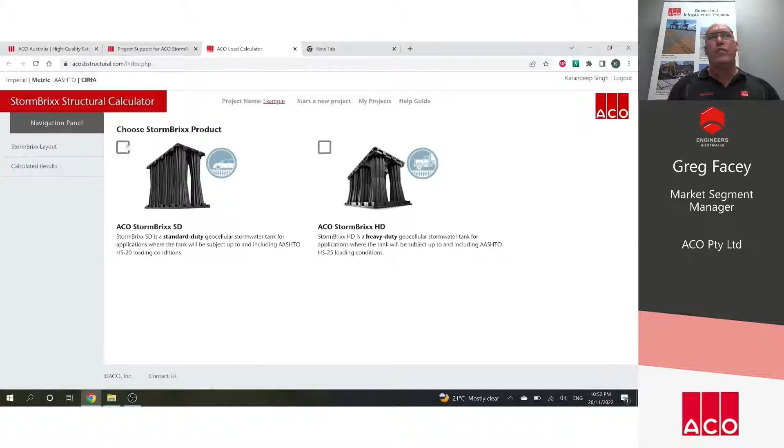Once submitted, at the top left-hand corner, you'll toggle metric units to CIRIA Guide for Australian standards or Imperial AASHTO for the North American market. To start, simply select either StormBrixx SD or HD, the number of layers, and enter the project's cover depths and water level details. For the environmental conditions section, select the live load pavement type and the soil type from the drop-down boxes that best describe your tank and project, and this will pre-fill the fields below.

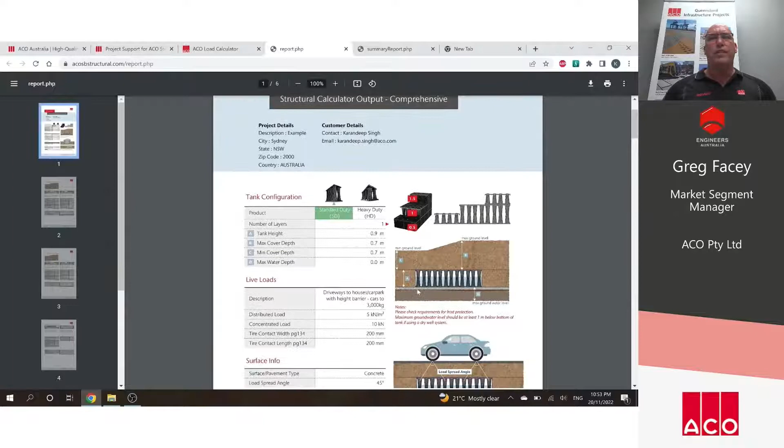This is all the inputs that are required. Click Next, and it will take you to the results page where you can download a summary report or a comprehensive report. The summary report contains the project details and a list of all the inputs on the first page, with the second page containing a summary of the results. The comprehensive report contains the detailed structural calculations over 4 pages.